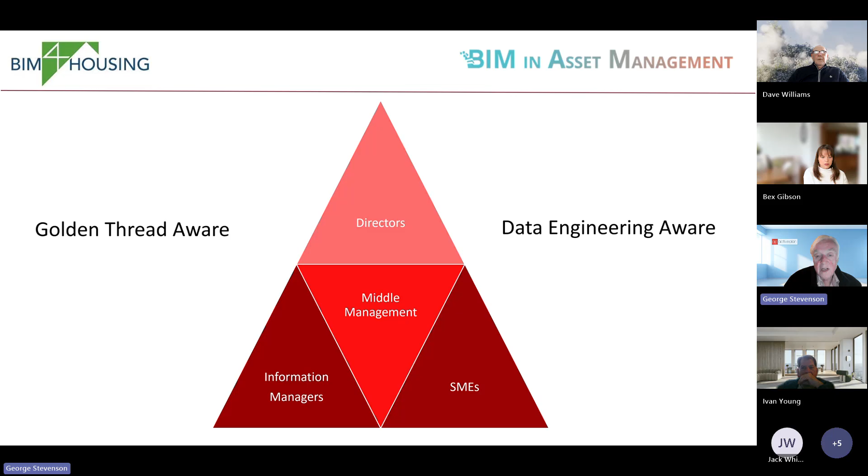So what we've tried to do is look at defining what the golden thread actually is, rather than it being a concept. It's electronic, and importantly, it goes right the way through the process. It actually starts before design, and it's easily transferred when there's a change of ownership. This comes directly out of the guidance.

I think what we need to do is help people like Ivan, who's a project manager, probably, with the greatest respect, driven commercially in many ways, to be able to interpret what the golden thread is about, so we can translate it into the needs of the organization to go through the different stages of the process.

And the analogy we're using is that it's like DNA—being able to go through the various different stages and then work through collaboration so that we end up removing traditional silos, and importantly, determining what information is needed, why it's needed, who's going to gather it, who benefits from it, and also what the potential cost savings are.

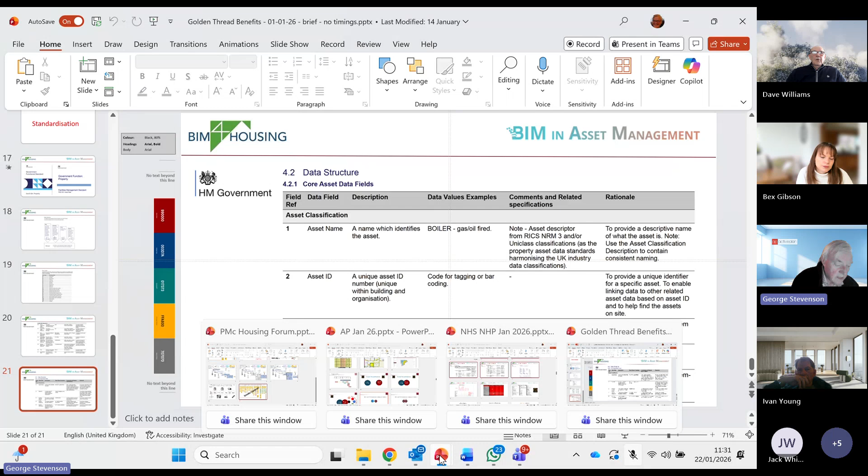So this is something called FMS 002, and I'll just finally say, yesterday we had in the design group meeting, we had Andy Green from Atkins join us, and he gave us a preview of something that's happening in the next month or so called the ADS Alliance.

So what they've done, they've brought together RICS, which is NRM, CIBSE, which is CIBSE Guide M, which is life cycle, NBS, which is Uniclass, and BESA that produces SFG 20, to try and align them so that everybody is then using the same language and terminology. So if you're interested in this, I'll send you a copy of this video, and we're going to be putting this together.

They're quite keen on our involvement in this. I've got another bit to show on the AI side of things, but I'm going to stop there now, Dave, to let us, because otherwise it's just me talking.

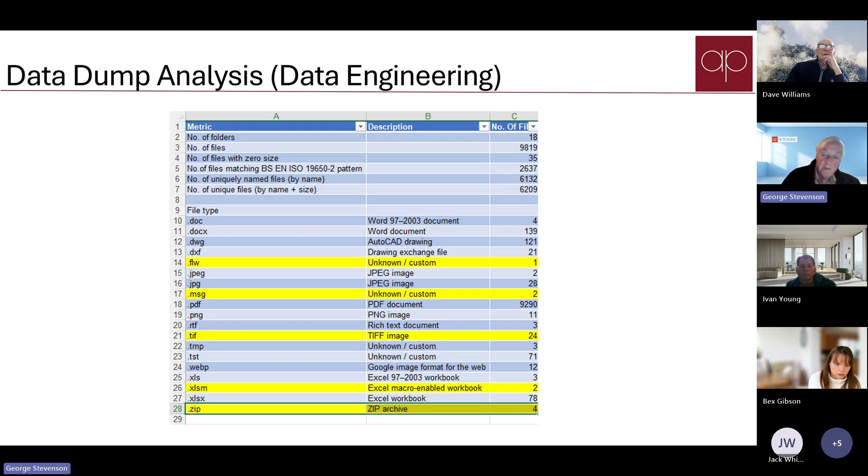So what we've done is create this tool that automates that process. We can audit, in this case, 10,000 files, and very quickly identify what was claimed to be in the schedule to see if the documents referring to that schedule are actually there or not. We can then turn that into prompts and come up with a dashboard that tells them very quickly where the gaps are in the O&Ms. That's the sort of thing we think will make a big difference to automating the process of checking O&Ms.

If anybody's interested in this, we've got a session on this coming up, haven't we Dave? But if anybody else is interested, just put O&M into the chat. So what it will then do is produce a report for each of the...

I'm showing this as Active Plan because we are actually doing this as Active Plan, but we're also including other people—that's the point about the AI working group. We've got about 30 people signed up to it now, contributing what they're doing, because this isn't a matter of just us—we're using a RAG database which is acting as the guideline or guardrails for ChatGPT to work.

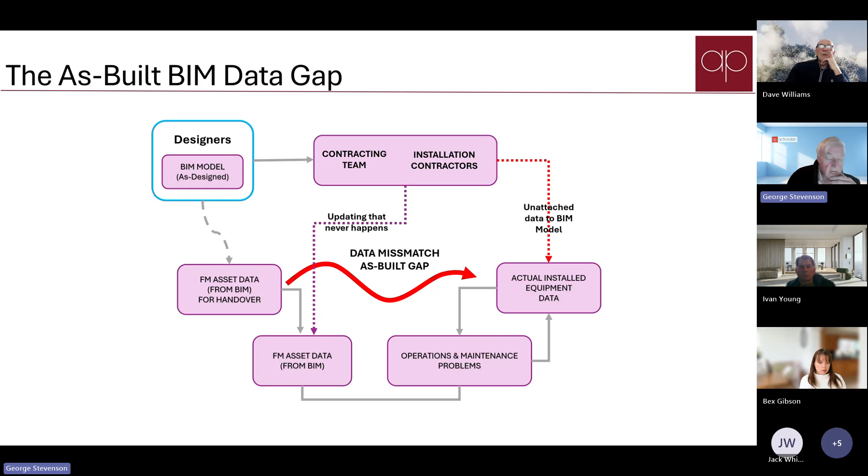Where we're going with this is to try and address the fact that the BIM models seldom contain all the asset information because they never get updated. They might in Jack's case, because Jack controls the process, but in many cases that doesn't happen—have some control over the process. Yeah, exactly, because at the end of the day it's down to supply chains, isn't it?

So what we're doing here is going through, for example, these door schedules. On this particular project there were 5 different door suppliers, and each had their door schedules formatted differently, which is pretty common. But we also discovered that the references in the spatial model, the BIM model, were different to the ones in the door schedule. Not much, but just enough that you've got to manually check everything.

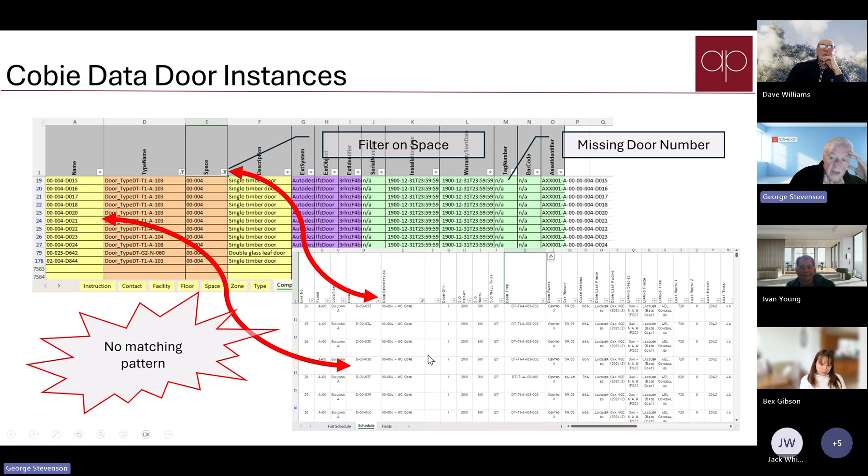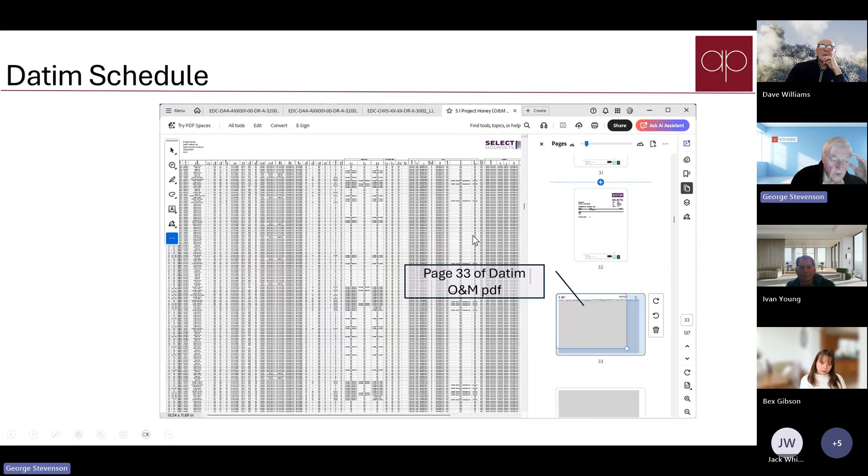Also, the door schedules themselves weren't provided in a machine readable format, so we had to pick them out of the PDFs and read them into the database. Now you might say that shouldn't be necessary because you should have templates and get the supply chains to fill them in. But in our experience they seldom do that, because they've not priced for it, or maybe someone not experienced enough is doing it, so you end up with the wrong information going in.

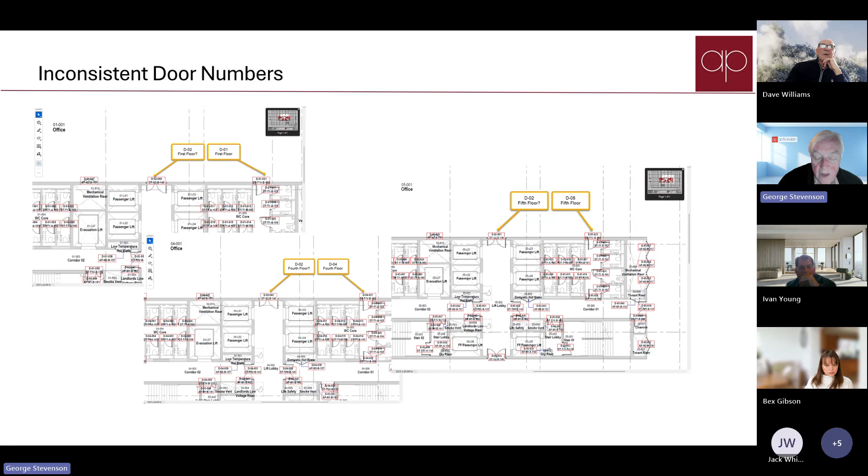That's another different door schedule. So again, doing that—by doing that we can also compare it with the drawings. In this case, what we discovered was the drawings themselves had just been copied up, so the door numbers on each of the floors weren't the right door numbers, meaning there's no connection between them.

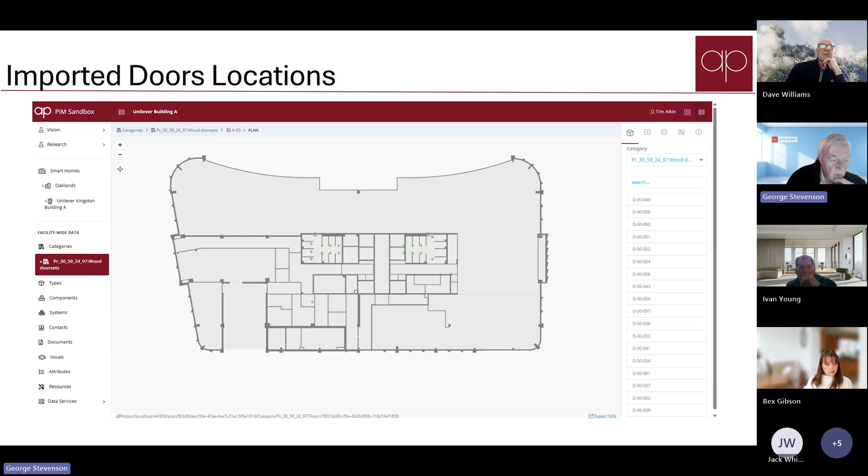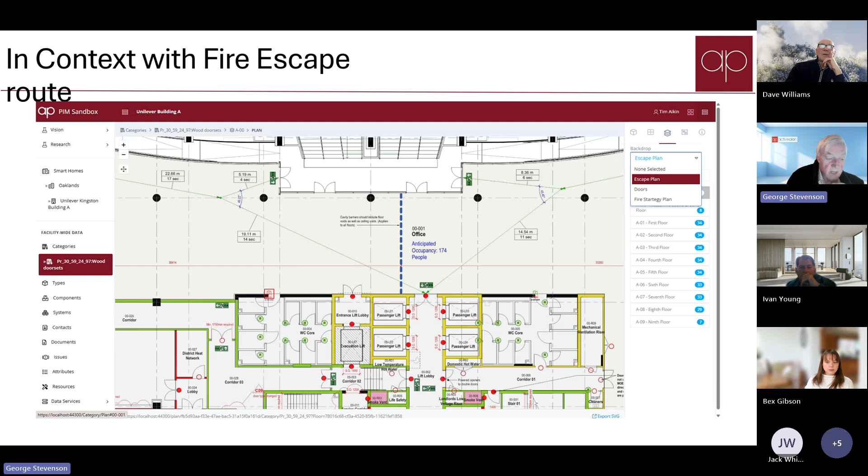So we basically re-sorted that. This is the way we did it as Active Plan, but it meant we've now got the doors as intelligent doors that are connected back—we can show the floor plans underneath them as well, and we're connecting that back, so we've got the context of that, and we can also apply that from a fire strategy perspective. That's the sort of thing we're trying to execute, so we can end up automating the process of checking for Reg 38.

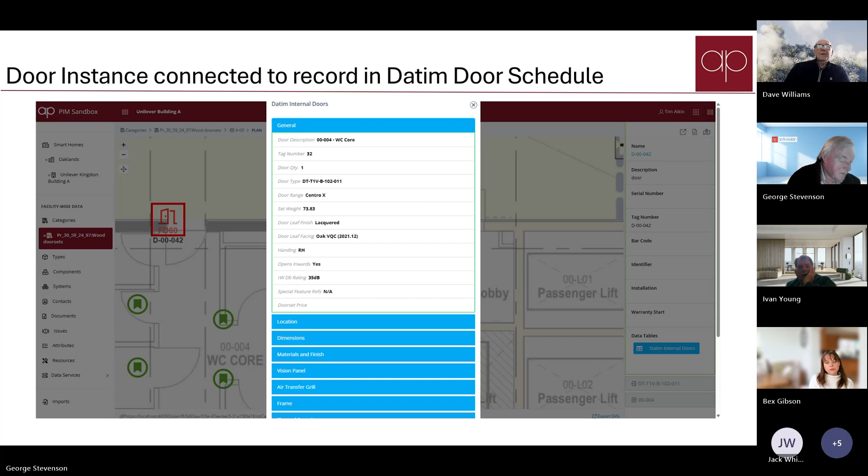Ivan. Yeah, this is great. What do we do about everything above the ceiling?

Well, the information about that's where things like open space and multi-vista that have been done during the design construction process, they pick those things up. So we can pick it up as if it's been done during that period. If it's above the ceiling on an existing building, then there's certainly technology that allows you to do the scans above the ceilings.

But I'm thinking about fire dampers, integrity of fire stopping, because you know how it is, and I saw a great example of this a couple of weeks ago from Lloyd's Bank, that a building will organically grow, particularly around data networking. So they find the easiest route to run a data cable might be through that fire damper, or

it might be we'll just poke a hole through that fire stopping and we'll run our data cables through there. That's the next problem that we're going to come up against, and the golden thread will only cover that to a point. But like you say, you've got to introduce new technology to be able to do that with a degree of success, to attach that to a planned preventative maintenance package.

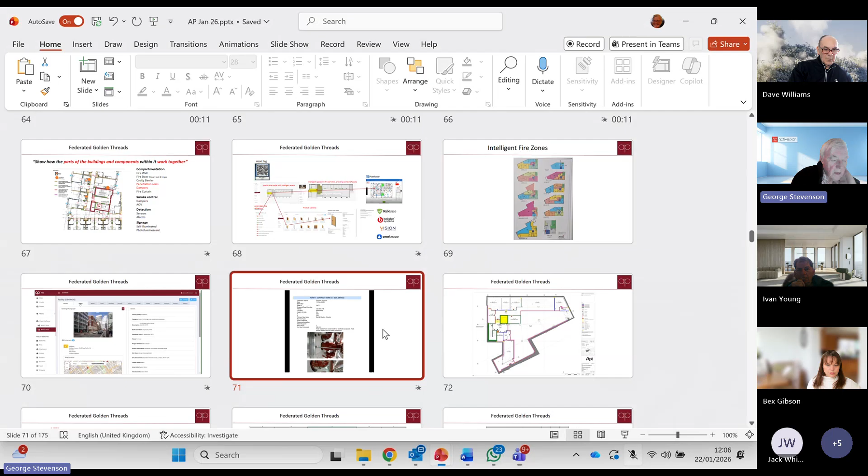Or what you can also do is, I'll just show you an example. You can take the information that is being delivered. So this is one that we've done on an existing building, where we've just extracted the information from, in this case, a fire stopping application called Boris.

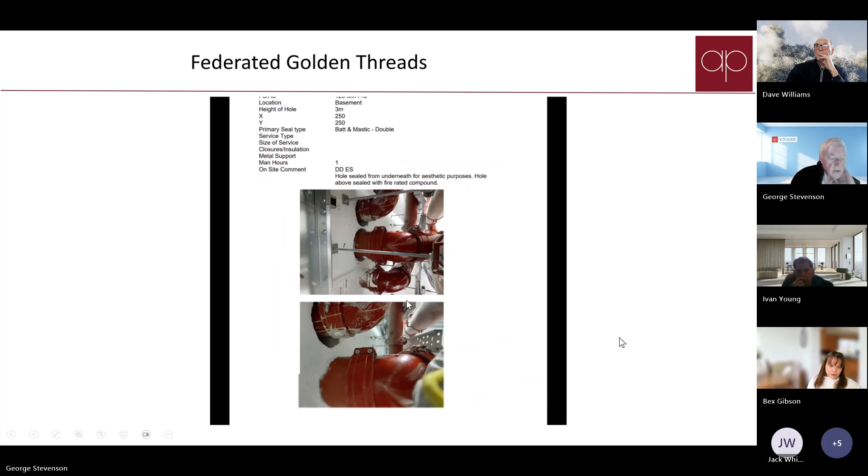So what we've done here, this was just in the O&M. So you've got a PDF report that identifies where all the fire stopping is. Now, that delivered what the contractor needed. In this case, I think it was Skanska. That was what they delivered, but there was 1,500 - every single fire stopping reference was on its own plan. So in the PDF, there was 1,500 plans.

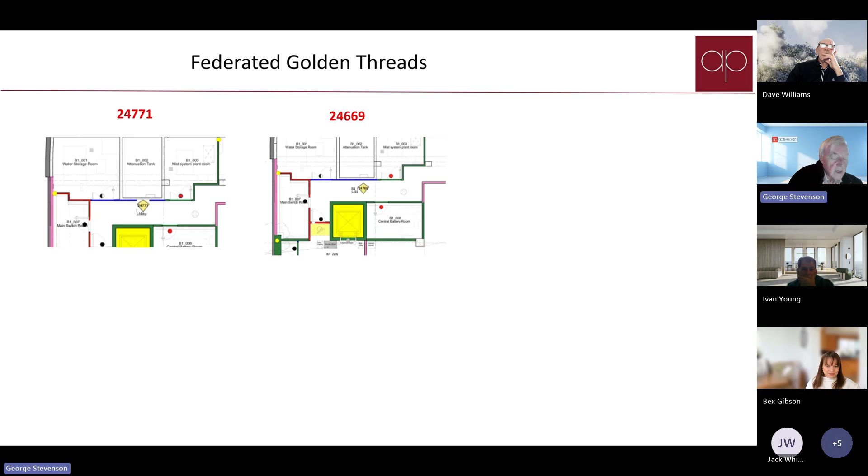Excellent. Yeah. And that's very, very common. Yeah. That's normally what happens. So the result is that you've got an individual fire stopping asset, but to be able to see what the fire stopping is along that corridor, you've got to open up 6 drawings.

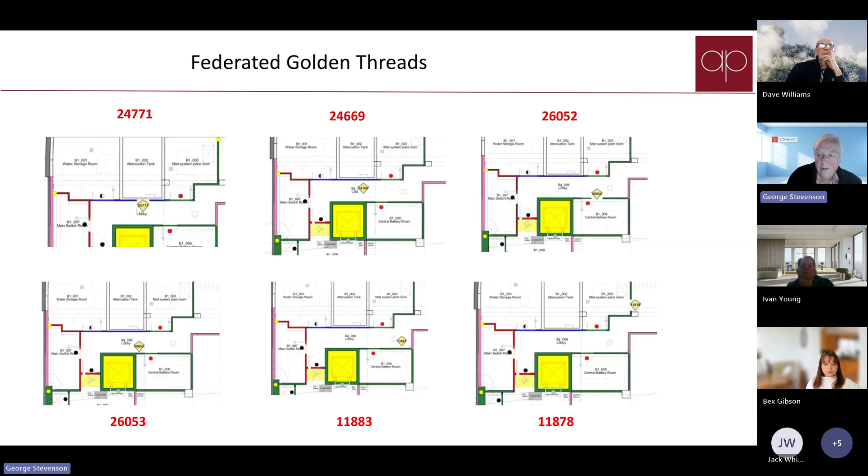Okay. So what we did, and again, this is just a way of using data engineering. This isn't AI, this is data engineering, but AI is involved in the one we're going to show you, Dave, in a couple of weeks' time. We have been using AI on that.

So we can identify where all the fire stopping assets are, and then we can read the tag number into the database. So that's read it from the PDF. Yeah, I mean, clearly that's not the best way of doing it, but it gets you across the line, doesn't it? And this is then giving me the XY coordinates.

So we then read that into the database. So therefore we've got the location of every single fire stop in a single view. Good work. We like that.

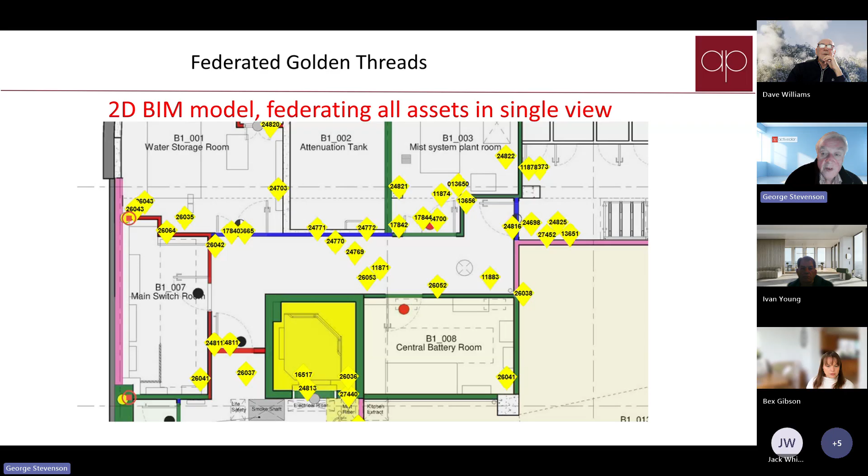Yeah. And this is what it looks like in the application. So it means that you can look at the fire stopping, and you can look at the fire doors, and you can look at the fire dampers, all through the same view. So you can then navigate through. You can walk down a corridor effectively, and you're seeing the information that was collected by the installer.

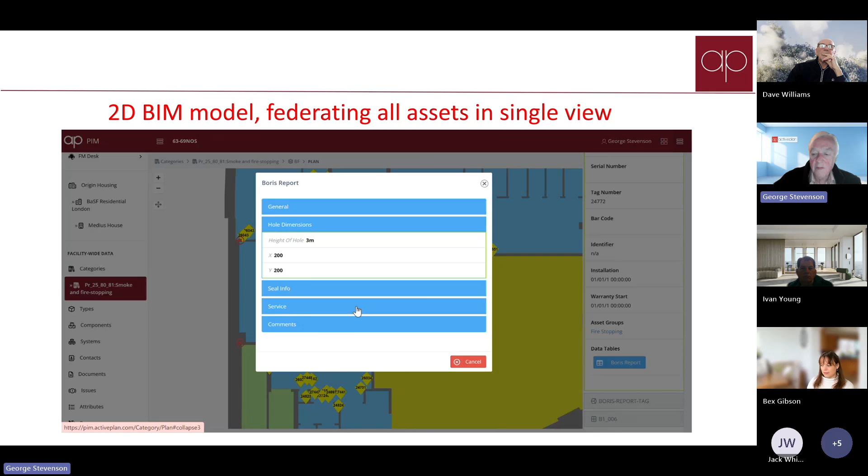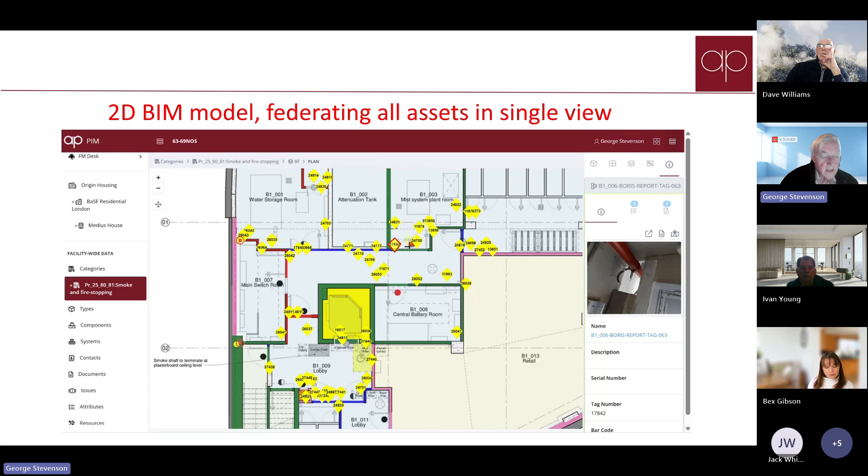So going back to what I was saying earlier, let's reuse what we've already got. It's already being paid for. It's a matter of really just gluing it together. And we can also underlay the drawings as well, so you can actually see underneath the spatial model where the firewalls are, if that makes sense. Yeah, I like that. That's good.

Connor's got. Is Connor still here? Yeah. Yeah, still here. We've got the Awaab's Law thing, Dave.

Is there anything else that we need to cover? No, I mean, apart from obviously, if anyone isn't already on the Awaab's Law task force / working group, then put that in the chat so that Richard can pick it up and add you to that group. Really, I think having that specific group around Awaab's Law is probably where the best - what do you call it? - the best coagulation of resources is present.

One of the things that I was going to suggest for this meeting, probably in the next meeting or future meeting, is I'm conscious that we have quite a lot of task force and working groups specialising in specific areas, and there isn't really a list that I can share on those. And they are growing exponentially, as you're aware, George and Richard, that in most of these meetings, we do ask for people to declare an interest in something and set up a meeting for it.

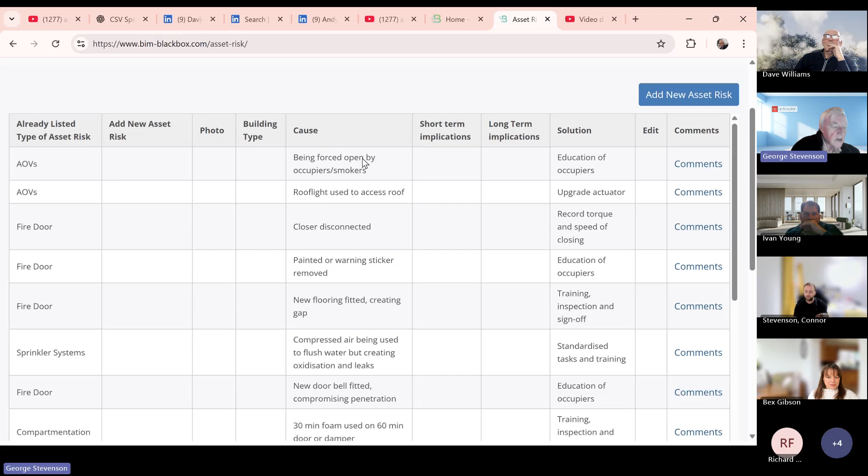So if that's something... I think that's actually the old page, George. This one, is it? Yeah. How have we managed that then? Yeah, we haven't got the link to the new page on yet because we're still sorting out. No, I agree, so this is the current black box thing. We've not yet put the impact one. That's what you're saying, isn't it, Richard? Yeah, sorry.

So anyway, in answer to your question, we are trying to provide that but we can provide a list as well, Dave, that we can send out in the minutes and things.

Just on that, while you're there Richard, hearing your voice - the digital handover thing, on that page it mentions John Morrow. He's no longer with Origin. I don't know whether he's still being involved with it or not. Right, okay, yeah, he did say he wanted to stick with it. I thought it's still with Places for People though, isn't he?

No, I think he's left. Oh, is it? Oh, we didn't know that. I'm fairly sure because someone mentioned it. Well, that's a shame, he's a good guy. Yeah, I don't know his reason. Funny enough, it's still showing him in the list at the moment, so maybe he hasn't left just yet.

Well, we might get Pencho involved in that. Pencho was in that team anyway, so yeah. I mean, there was Pencho and Tina, but Tina's more new homes rather than development as such. Good, yeah, so he's still on our list, so he's still there at the moment. But I was told he was leaving.